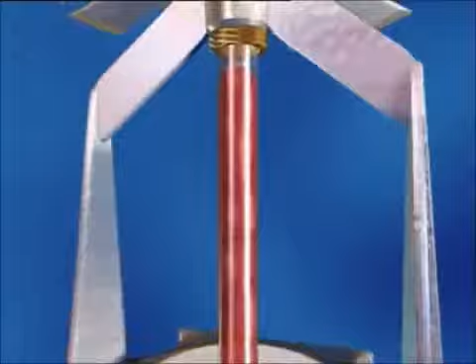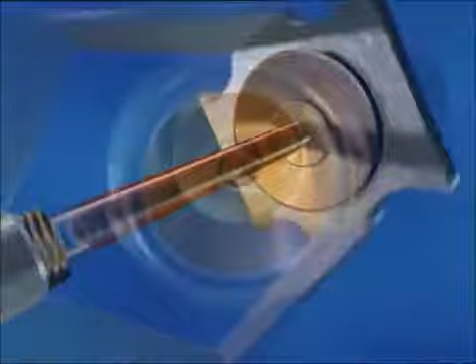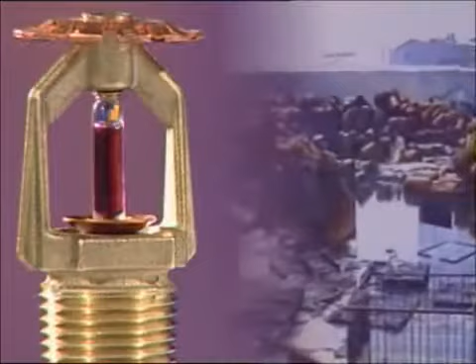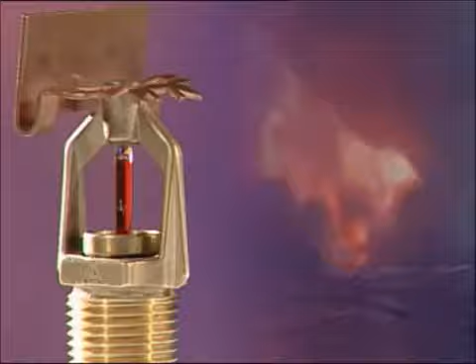Fire sprinkler systems were invented over 120 years ago. Since then, several hundred million sprinkler heads have been installed throughout the world. In that time, they've effectively protected thousands of buildings, helped to prevent the financial collapse of numerous businesses, saved countless lives, prevented innumerable burn injuries, and protected the environment from catastrophic fire-related pollution. They're universally acknowledged as the most effective first line of attack against fire.

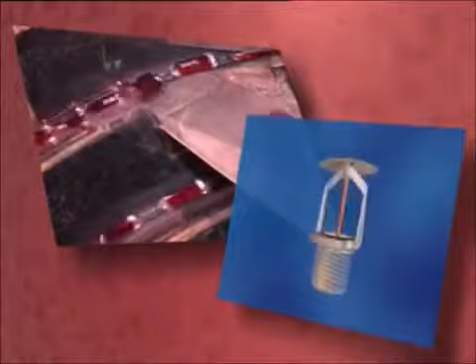The world's first rules for the design and installation of automatic fire sprinklers were written in the UK by John Wormald in 1885. Fire sprinkler systems in the UK are generally designed in accordance with British Standard 5306 Part 2 and, in some instances, Loss Prevention Council (LPC) rules for automatic sprinklers. American rules may sometimes be used, being Factory Mutual or National Fire Protection Association. Sprinklers are designed to cope with the fire risk presented by each individual building and may also be specifically configured to save lives.

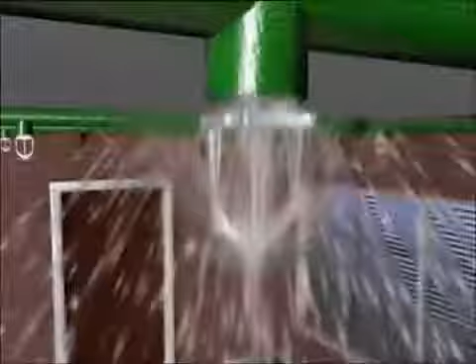Water still remains the most effective firefighting medium available. Sprinklers will deliver water right into the heart of a fire during its early stages through a specially designed sprinkler head. Sprinkler heads are unique. They automatically detect a fire, discharge water right into the seat of the blaze, and operate a local alarm. They can also operate a remote alarm to alert the fire brigade or other emergency centre.

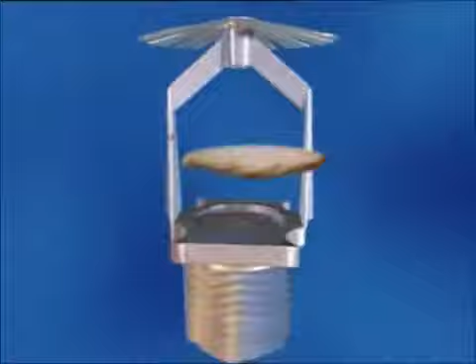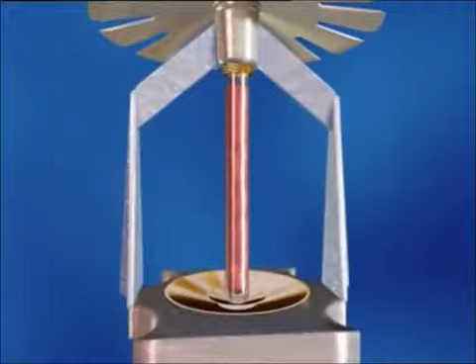A typical sprinkler head comprises a threaded body to connect to pipework, with a valve seal to hold back the water. The valve seal is retained by a glass bulb which contains a liquid that has a high coefficient of expansion. A small measured quantity of vapour remains trapped when the bulb is hermetically sealed. When the liquid expands under the influence of heat from a fire, pressure in the bulb rises until the vapour is compressed. Further increases in temperature cause a rapid build-up of pressure sufficient to shatter the bulb, releasing the valve seal and allowing the water to flow onto a water distribution deflector. This results in an even distribution of water droplets in a predetermined pattern over the fire.

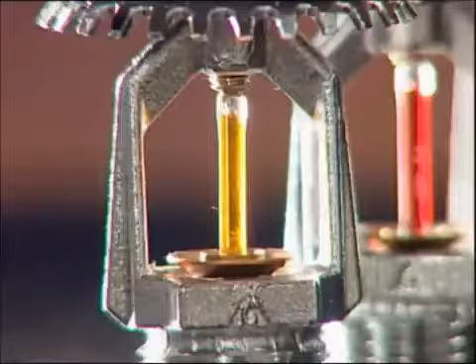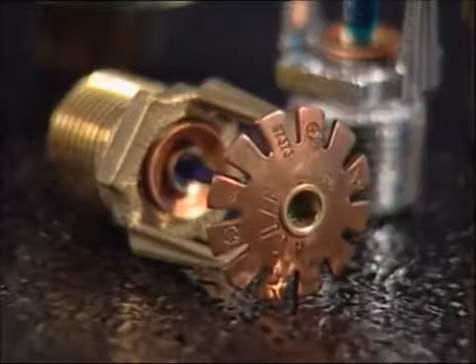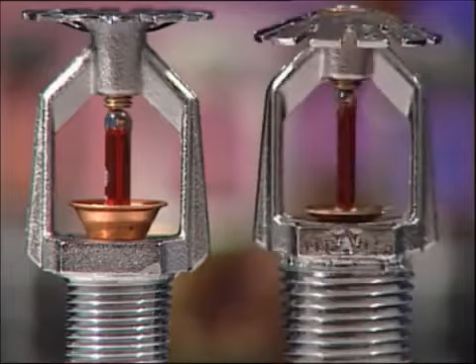Sprinkler heads are available in a variety of operating temperatures, which are identified by the color of the bulb. The specifier has a vast array of sprinkler heads available to him. Each type of head is designed to cope with different fire risks, different operating temperatures, and different operational requirements. The British Standard defines fire risks as light hazard, ordinary hazard, or extra high hazard. Generally, as the hazard increases, so does the water discharge or density discharge.

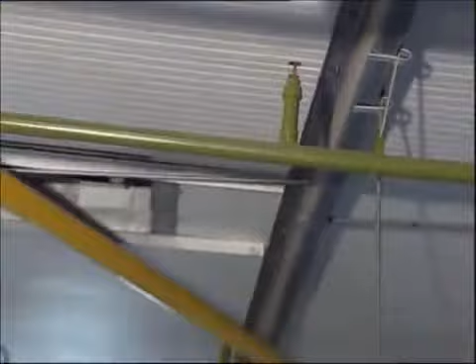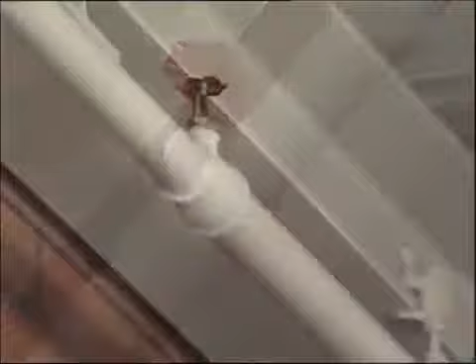Conventional sprinklers can be mounted in either the upright or pendant position, with a deflector designed to spray a proportion of the water discharged onto the surface of the ceiling. Spray sprinklers in upright or pendant positions are used for applications where all the water needs to be discharged downwards. Sidewall sprinklers are primarily used to keep ceilings clear of pipework for aesthetic reasons or to avoid having to disturb existing ceilings when installing. Each sprinkler protects up to 17 square meters in light hazard fire risks and 9 square meters in ordinary hazard fire risks.

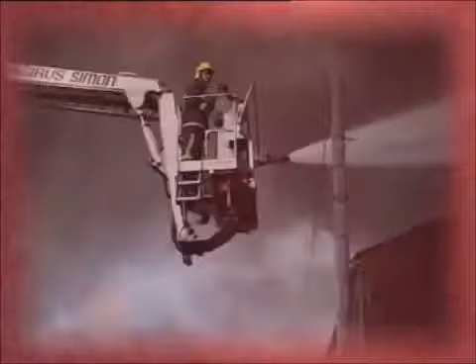Sidewall sprinklers with extended coverage are specifically designed to give an extended coverage of water distribution, with one sprinkler able to protect an area of up to 21 square meters. This type of sprinkler must have a quick response bulb. In a fire, few deaths result from direct contact with flames. The greatest threat comes from inhalation of the products of combustion, such as carbon monoxide, hydrogen cyanide, hydrogen chloride, other toxic gases, and the associated heat.

The reaction time of quick response sprinklers minimizes the life-threatening levels of toxic gases and temperatures. In many environments, there are people who cannot escape without assistance, such as in hospitals or homes for the elderly. Quick response sprinklers provide valuable time for those in charge to assist their escape.

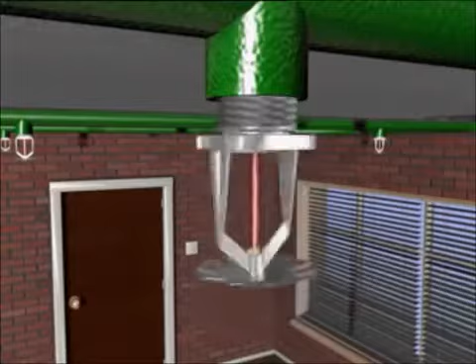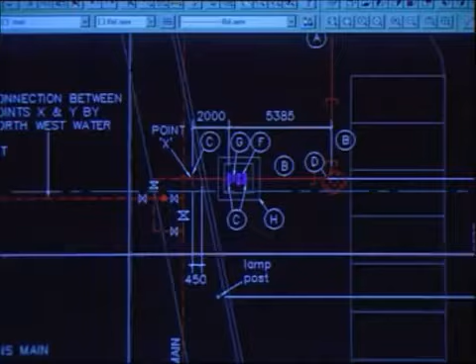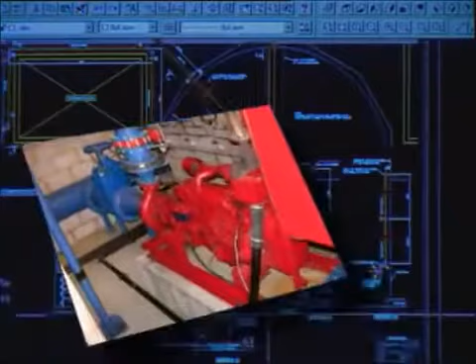A sprinkler head is connected to a water supply via a network of pipes fed throughout the building. The area protected by each sprinkler head can vary from 9 square meters to 21 square meters depending on the fire risk. The pipework is hydraulically designed to ensure the correct flow and pressure of water is maintained at each sprinkler head. The water supply to the system can be fed from the town main for light to medium fire risks, such as residential, offices, hotels, and light manufacturing and commercial occupancies. For high fire risk areas, such as heavy manufacturing and warehouse storage, a pumped supply from a water storage tank or reservoir is normally necessary.

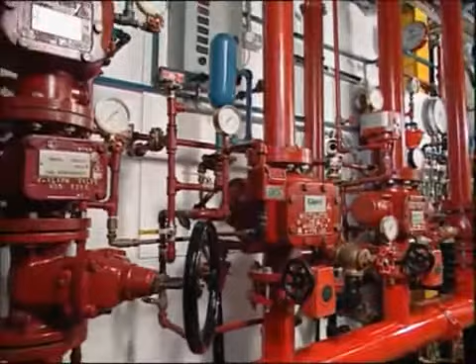The design requirements are specified in the British Standard BS 5306 Part 2 and LPC, FM or NFPA design rules. A control and alarm valve automatically delivers the flow of water to the sprinkler heads. There are generally 5 types of sprinkler system that all require different valve arrangements. A wet system is where the pipework is permanently charged with water and used to protect premises where temperatures are unlikely to fall below freezing point.

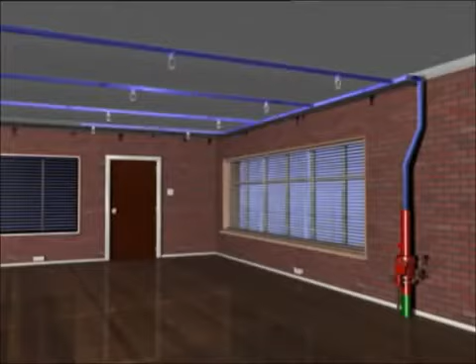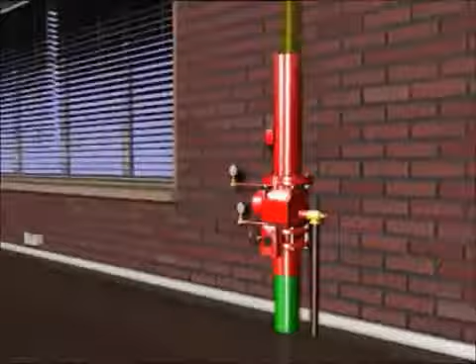Where the ambient temperature may fall or be below freezing point, the presence of static water in the sprinkler pipes is clearly undesirable. In this situation, a dry system can be installed in which the pipework is charged with compressed air. When a sprinkler operates, the compressed air is released and the control valve opens, allowing water to flow into the pipework and to discharge from the operated sprinkler heads.

An alternate wet and dry system, as the name implies, allows the system pipework to be alternately charged with water in summer and with air in winter, when there is a risk that the ambient room temperature can fall below freezing.

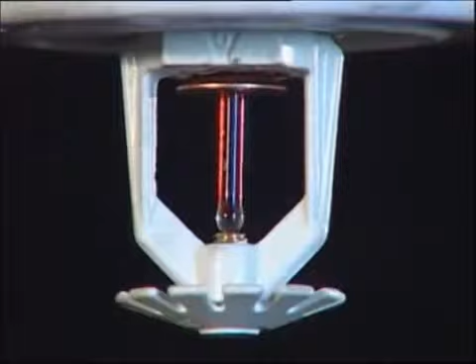Pre-action systems are comprised of a standard sprinkler system and an independent electrical system of heat or smoke detectors installed in the same areas as the sprinklers. On receipt of a signal from 2 or more detectors, the main control panel automatically opens the control valve, allowing water to flow into the sprinkler pipework. Water is only discharged when the individual sprinkler heads reach their operating temperature. Any physical damage to a sprinkler in a non-fire situation will not result in water discharge, but will cause both visual and audible alarms to be raised at the main control panel only.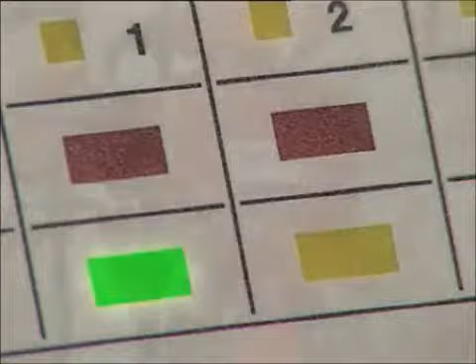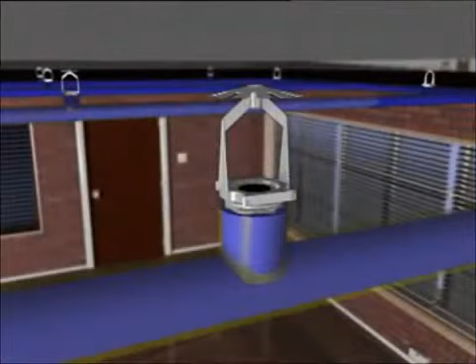A deluge system, unlike any other typical sprinkler system, is designed specifically for high-hazard applications with fast fire growth potential. The deluge valve is actuated by a separate detection system responding to a fire. This brings a large number of open sprinklers into action simultaneously throughout the protected area.

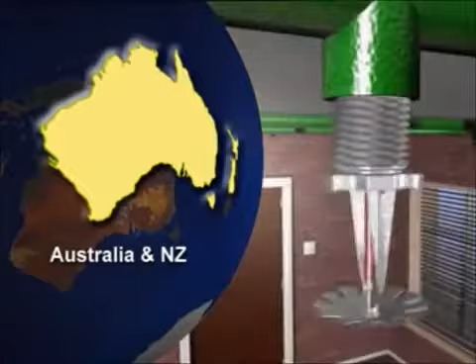The successful performance of sprinkler systems has been detailed in records from across the world, paying testament to their outstanding reliability and effectiveness. In Australia and New Zealand, where it's a requirement that all fires must be reported, records reveal that over a 100-year period, sprinklers successfully controlled 99.5% of fires in sprinklered premises. Statistics collated in Europe over the last decade are remarkably similar, showing that in fully sprinklered premises, 99% of all fires have been controlled by the sprinkler system.

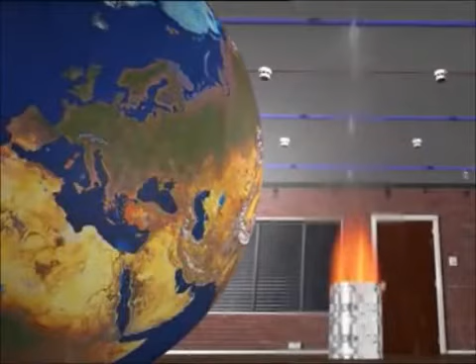The reason sprinklers are so effective is because they attack the seat of the fire before it has time to grow and spread. There's no excessive use of water. In Germany, for example, 86% of fires in sprinklered locations have been controlled by 5 or fewer heads. In the UK, it's reported that of the fires in sprinkler-protected buildings over a 10-year period, almost half were controlled by 1 or 2 sprinkler heads only.

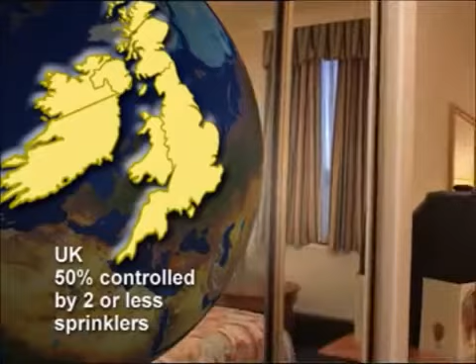Fire brigades, local government authorities and politicians alike have all seized upon these statistics. This has generated numerous campaigns for sprinklers to be installed in applications that could only ever have been dreamt about when sprinklers were first commercially launched over 120 years ago. That's because sprinklers are unique. They not only detect a fire and raise an alarm, they operate to control it and in many cases extinguish the fire before the arrival of the fire brigade. Only the sprinkler heads closest to the fire operate.

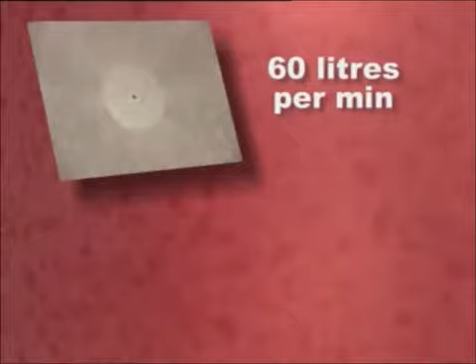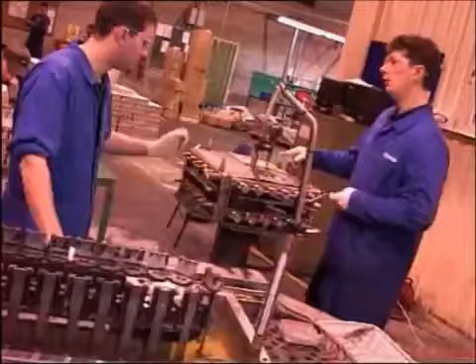Water is discharged by a sprinkler directly onto a fire at a rate of a minimum of 60 litres per minute, in comparison with an unsprinklered building where the fire brigade using only 1 fire hose could discharge 500 litres per minute. The fire will also be much larger as it will have grown for at least 10 minutes before the fire brigade arrive, so the likelihood is that more than one hose would be used. Worldwide research shows that of the 40 million sprinklers installed every year, only 2 may operate accidentally. This is because every head is individually tested before leaving the manufacturer.

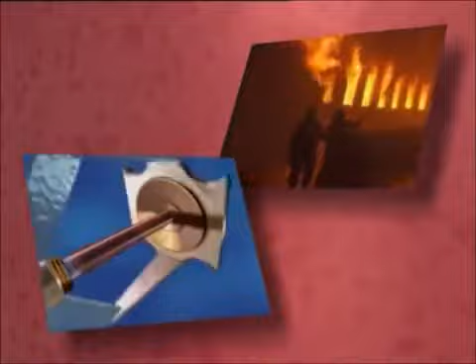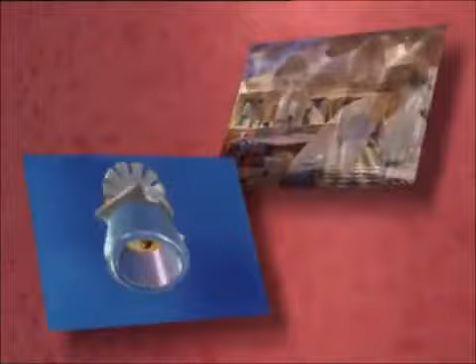Sprinklers are economical to install. For example, in the case of office blocks and hotels, the sprinkler system would cost about the same to install as a quality carpet for the equivalent area. Sprinkler systems will have a lifespan of at least 25 years, probably 50 years. Some systems are still in use today that are over 120 years old. The threat from fire will never change. It will always be with us, endangering life, property, and the environment we live in. Fire sprinklers will protect us and future generations. Fire sprinklers. Protection for life.